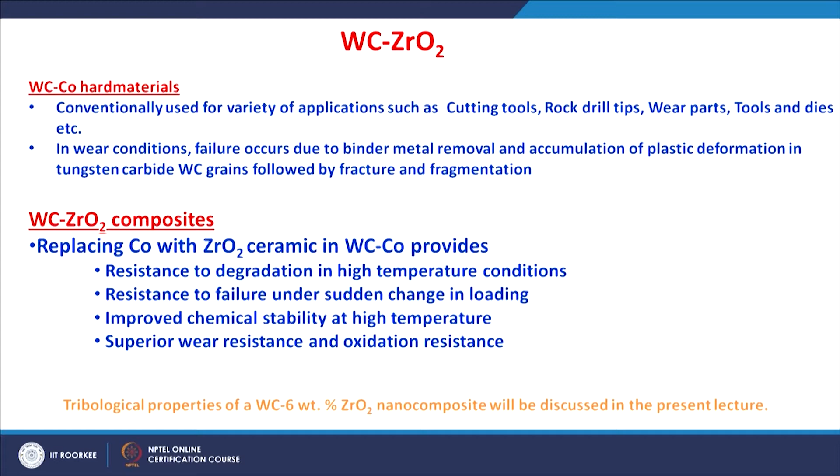So in this lecture we will see the key results obtained for the tribological behavior of a tungsten carbide 6% zirconia nanoceramic composite. First, tungsten carbide of around 0.2 micrometer and zirconia, which is a tetragonal zirconia stabilized by 3% yttria.

So 3 mole percent yttria stabilized zirconia powder of around 27 nanometers. These two powders, tungsten carbide and zirconia, were mixed into a tungsten carbide 6% zirconia powder mixture.

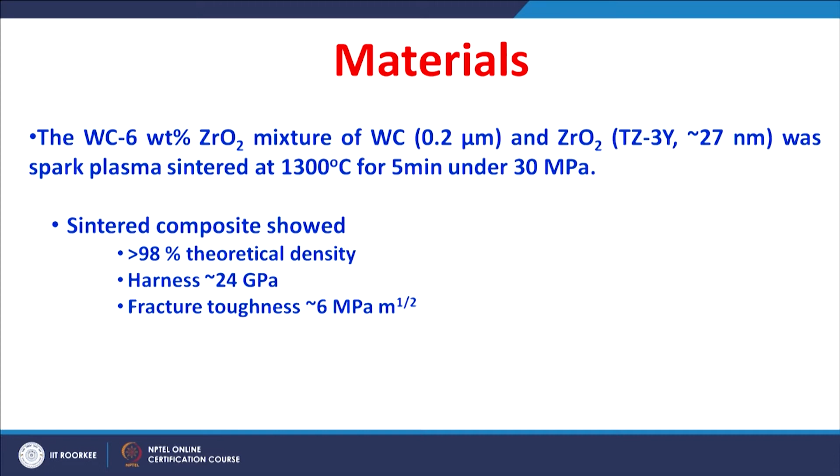This mixture was spark plasma sintered at 1300 Celsius for 5 minutes under 30 MPa pressure, with a high heating rate of around 600 Kelvin per minute.

All these ceramic composites showed very high density, more than 98% of theoretical density, and also showed hardness of around 24 gigapascal and fracture toughness of around 6 MPa root meter.

The tungsten carbide cobalt material generally has a hardness of around 11 to 12 gigapascal, whereas tungsten carbide zirconia has an extremely high hardness of around 24 gigapascal. Of course, the fracture toughness is moderate at 6 MPa root meter.

The sintered tungsten carbide zirconia ceramic composite was investigated for phase analysis and microstructural characterization. Phase analysis by X-ray diffraction indicates predominant phases of tungsten carbide and tetragonal zirconia, with no other phase formed and no change from tetragonal to monoclinic zirconia during sintering.

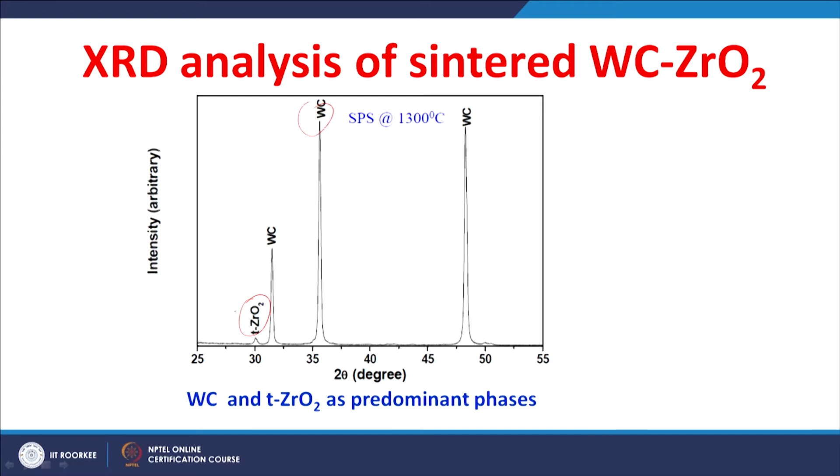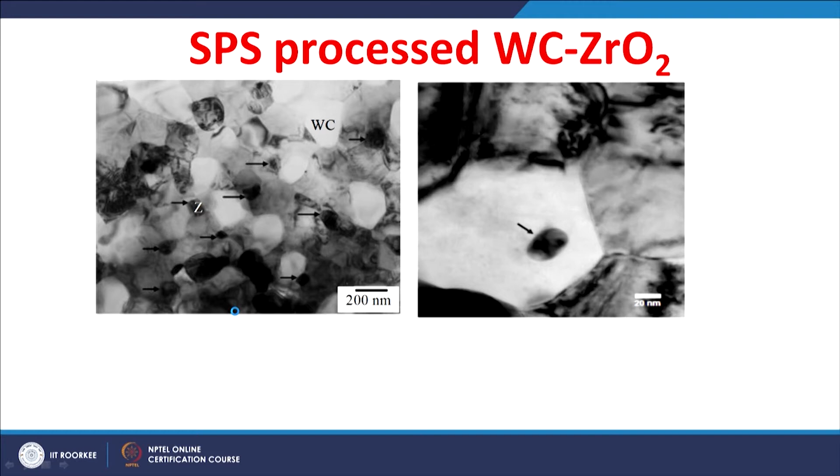This shows the efficiency of the sintering technique we used, that is spark plasma sintering. The spark plasma sintered tungsten carbide zirconia ceramics showed a microstructure of equiaxed tungsten carbide grains, with zirconia particles along the grain boundary as well as inside the grains of the tungsten carbide.

The equiaxed tungsten carbide grains have an average grain size of around 0.3 to 0.5 micrometer, whereas the zirconia particles are still within the nano region, around 30 nanometers.

Considering the initial particle size of around 0.2 micrometer for tungsten carbide and around 27 nanometers for zirconia, this sintering technique is efficient in producing a dense tungsten carbide zirconia ceramic material with zirconia particles in the nano region distributed within the grain structure of the tungsten carbide.

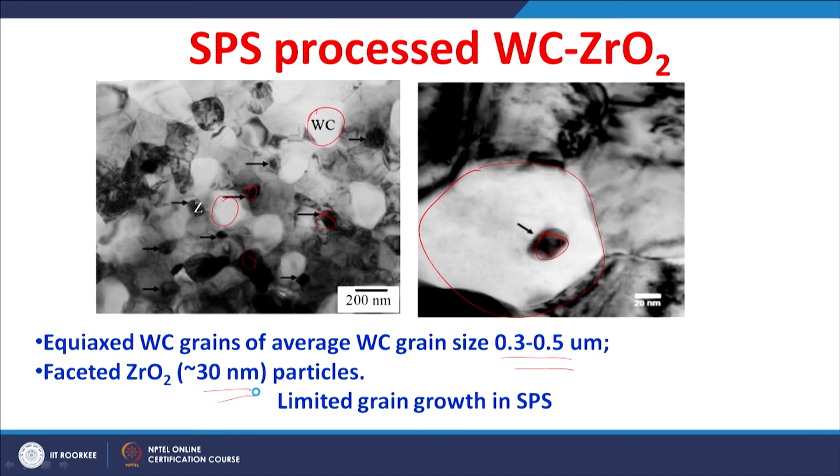There is limited grain growth occurring in spark plasma sintering, which gives a combination of superior properties. That is how we got a very high hardness of around 24 gigapascal and a moderate fracture toughness of around 6 MPa root meter.

These tungsten carbide 6% zirconia ceramics were fretted against steel at different loading conditions with a fixed combination of fretting parameters.

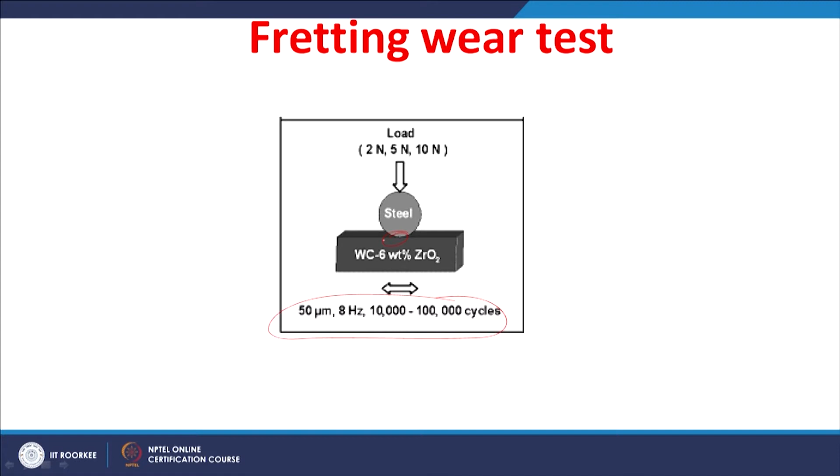This fretting was done under mode 1 fretting conditions, which gave gross slip conditions at the contact. The fretting test parameters were fixed at 50 micrometer oscillation displacement with a frequency of 8 hertz, and fretting was conducted with varied numbers of cycles from 10,000 up to 100,000 cycles.

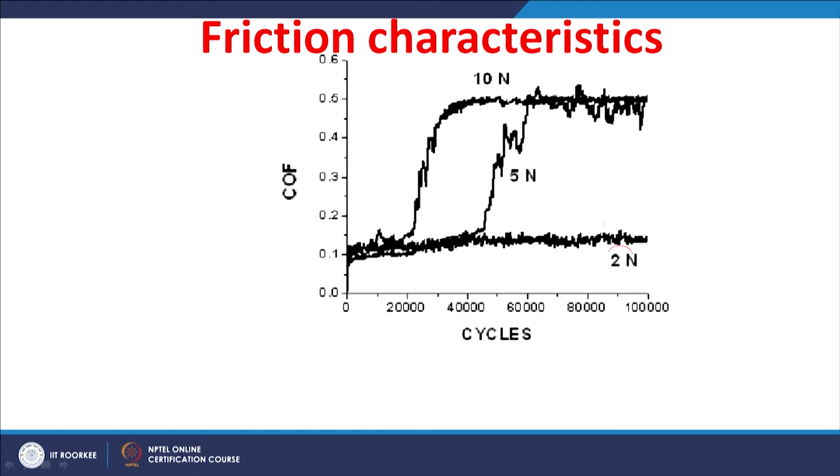Let us understand the frictional characteristics as a function of fretting duration and load applied. This fretting shows friction is strongly dependent on both load and number of cycles. At lower load, friction drops to a very low coefficient of friction around 0.1 within about 20,000 cycles, and remains almost the same throughout the test up to 100,000 cycles.

There is no change in the coefficient of friction. Whereas, as the load is increased to 5 Newton, the friction coefficient is around 0.1 to 0.15 in the initial 20,000 cycles, and as it reaches 40,000 cycles it shoots up, and by around 60,000 cycles it goes to the maximum coefficient of friction of around 0.5. So there is a transition with the fretting duration for the test done at 5 Newton load.

And if you see the test done at the 10 Newton load, the transition occurs even at an early stage. The coefficient of friction was less in the initial stages of around 20,000 cycles. Immediately after 20,000 it went up to

0.5 average coefficient of friction in the steady state, and this reaches around 40,000 cycles. So there is always a running-in state and the steady state, with no much difference between the running-in state coefficient of friction and steady state coefficient of friction at lower load, whereas there is a difference in the running-in state coefficient of friction and the steady state coefficient of friction at higher loads.

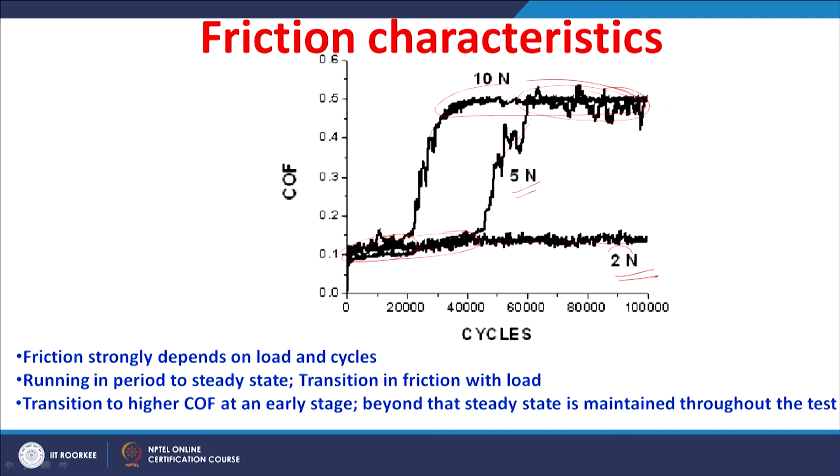In addition to that, we saw a transition occurring from low load to higher load in the friction. So the transition to higher coefficient of friction occurs at an early stage for the test done at a higher load, and once it achieves the steady state, it remains in the steady state throughout the test.

The wear rate was also determined. You can see the wear rate varying from around 0.2 into 10 power minus 8 mm³ per Newton meter to around 1.2 mm³ per Newton meter. So there is a change in the wear rate with change in the load as well as the number of cycles of this fretting. First of all, the wear rate is of 10 power minus 8 mm³ per Newton meter.

This is a very low wear rate as you compare with the wear rate obtained with the conventionally sintered tungsten carbide 6% zirconia ceramic. This shows 10 power minus 6 mm³ per Newton meter, whereas the spark plasma sintered tungsten carbide zirconia nanoceramic composite exhibited a wear rate of 10 power minus 8 mm³ per Newton meter.

So increase in wear rate is also observed with increase in the load as well as the cycle. Now, at a lower load, the wear rate was less for the test done for a small number of cycles, that is 10,000 cycles. For the test done at 10,000 cycles, even if you change the load, there is no much difference. It actually changes from around 0.2 to around 0.4 into 10 power minus 8 mm³ per Newton meter.

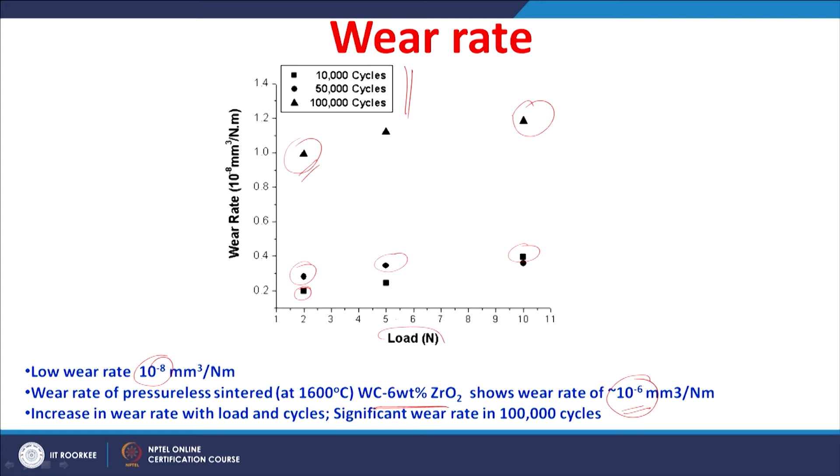Similar to that we observed for the friction, wear also changes with the load or the fretting duration. So the wear depth also indicates very important information. There is a negligible wear depth at lower loads of 2 Newton, but a significant increase in the wear depth as well as the wear rate at the higher loads of 10 Newton.

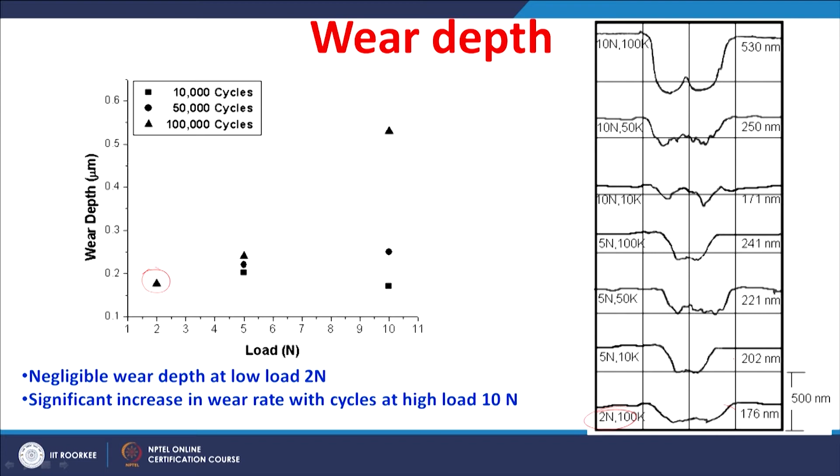Now these surfaces also indicate the tribolayer is severely cracked. The severe cracking of this tribolayer indicates it is non-protective in nature. So when the tribolayer is non-protective, it cracks, and then the underneath surface is again subjected to further wear. At a higher load of 10 Newton, more pronounced cracking is observed after 100,000 cycles.

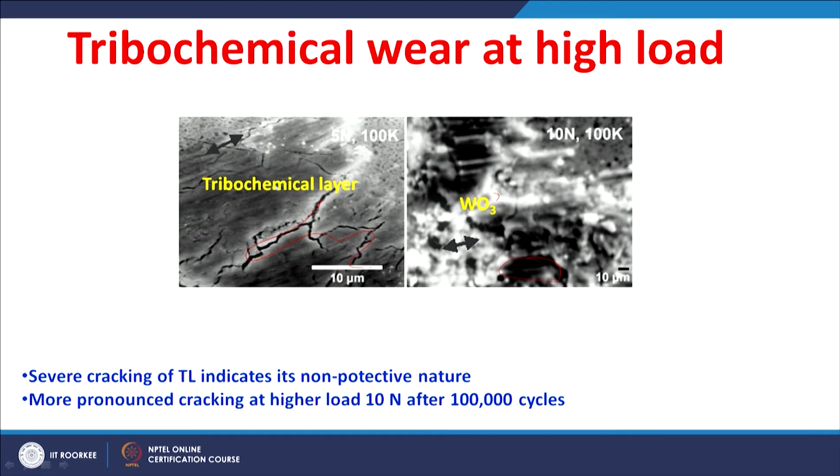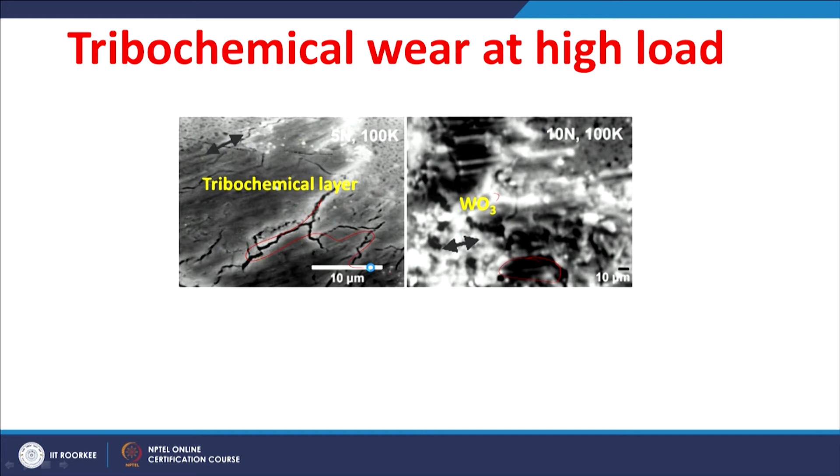So tribochemical wear is dominant at higher loads, that is 5 Newton or more. At lower loads it is mild abrasion, and at higher loads of 5 Newton or more it is a tribochemical layer formation and then removal, which we call tribochemical wear. So there is a change from abrasion to tribochemical wear with change in load in these studies.

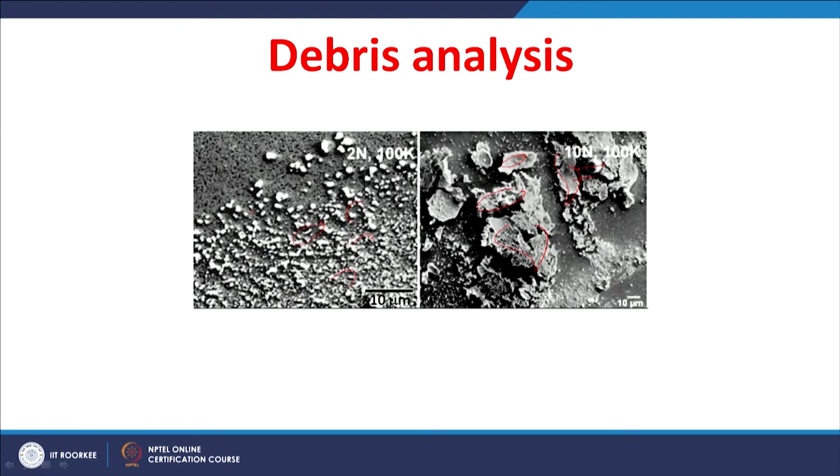The debris are also collected, and the debris analysis shows there is a striking difference with respect to load. At lower load you can see debris of a very small size, whereas at increased load of 10 Newton dominantly the debris are sheet-like or plate-like with a larger size. Of course there is smaller debris here too, but predominantly it's sheet-like debris.

The sheet-like debris is around 50 to 100 micrometers, whereas the small size debris observed after fretting at lower load of 2 Newton is around 2 micrometers. So there is a change in the size as well as the shape of the debris with respect to load.

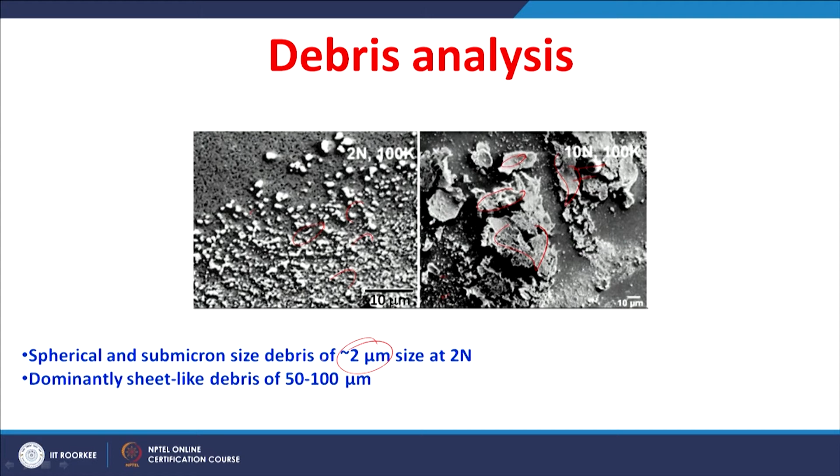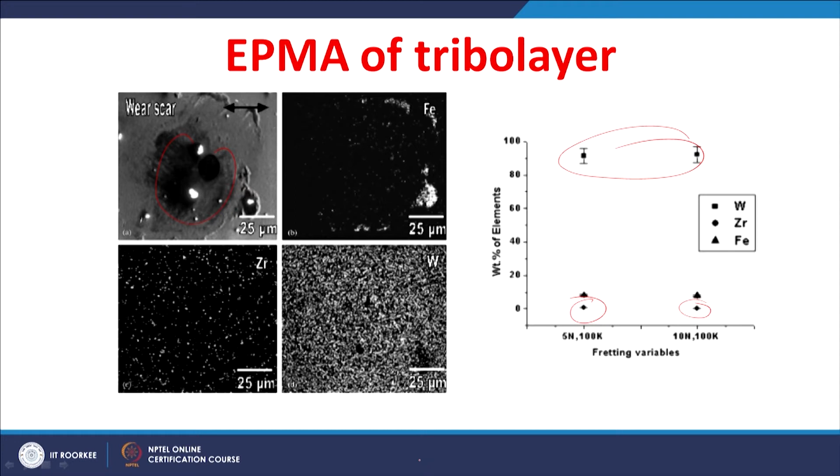So let us understand the wear resistance of the ceramic nanocomposites. Two important factors have to be considered: number 1, the high hardness, and number 2, fine microstructure.

The higher hardness, which is extremely high for this nano ceramic composite, around 24 gigapascal, leads to lower friction and wear, but this is observed only at a lower load of 2 Newton. At lower load there is very little wear, characterized by low wear depth, less than 1 micrometer. The material damage is restricted to the submicron region below the worn surface.

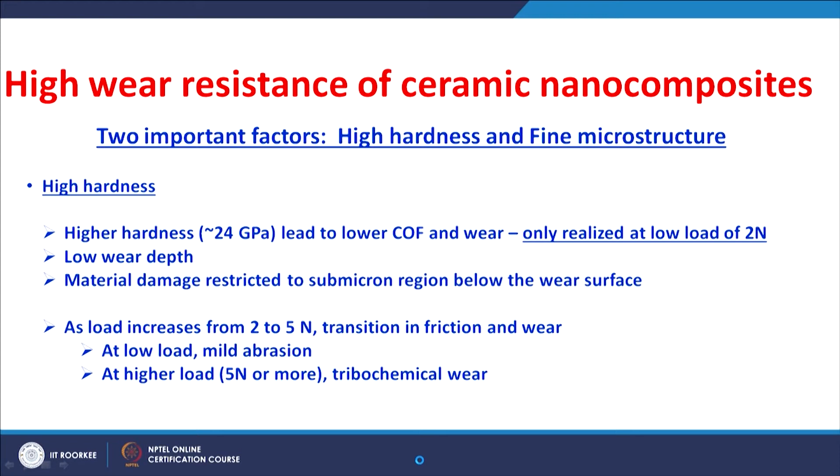Whereas at higher load, as load is increased from 2 to 5 Newton, there is a transition in the friction and wear. At lower load there was mild abrasion, whereas at higher load, that is 5 Newton or more, tribochemical wear dominates.

With respect to the finer microstructure obtained by spark plasma sintering for these nanoceramic composites, at lower load of 2 Newton you find fine debris. The fine debris particles necessarily indicate the pull-out of tungsten carbide particles, and once these are pulled out, these tungsten carbide particles are subjected to fracture.

These are caused by the repeated fretting strokes, and once these pulled-out tungsten carbide particles are in contact where this fretting is continuing under ambient conditions, there is a possibility for oxidation. So the pulled-out tungsten carbide particles are oxidized to tungsten oxide.

So we can infer that there is mild oxidative wear occurring at the contact at lower load conditions of 2 Newton, whereas at higher load of 5 Newton or more, these oxidized debris form a tribochemical layer rich with tungsten oxide or iron oxide. Once this tribochemical layer is stabilized, the contact is actually between the steel ball and the layer.

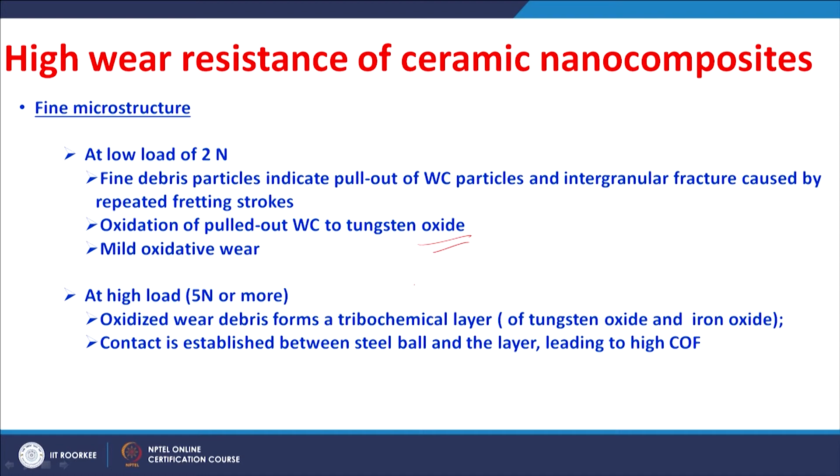It is not between the steel ball and the tungsten carbide zirconia surface, but between the steel ball and the layer, and because of that you get a higher coefficient of friction. So we can also understand the transition in the wear mechanism by studying the debris size.

In a lateral fracture model, the minimum load required to produce the fracture, because of the point contact, is dependent on the fracture toughness and hardness values.

Roberts has explained that the minimum load required can be determined if you know the fracture toughness and the hardness for the Vickers indentation. In this formula, beta is a constant relating the hardness to diagonal; for Vickers indentation it is 2.16, whereas the constants eta and theta are taken as 0.2. From this, we can get the minimum load required for fracture to occur where there is predominantly abrasion.

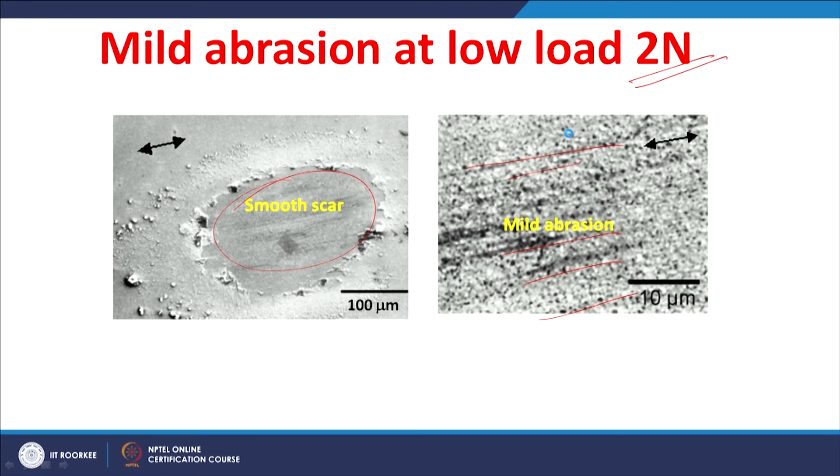The minimum load required for such an abrasion induced fracture is around 2.15 Newton for the investigated ceramic composite. As we have seen, there is predominantly mild abrasion happening at a lower load of 2 Newton. So it is quite possible that at a lower load of 2 Newton, such a fracture is initiated and then the removal of material occurs by abrasion.

Once this material is removed as debris, these debris are trapped in the contact and few of them may be ejected out of the contact. That leads to a lesser coefficient of friction, and also because of these debris in the contact, it actually is a 3 body abrasion. In 3 body abrasion, these particles are able to roll easily, so it gives lesser wear.

So all this at a lower load of 2 Newton, you get a minimum load of 2 Newton that is sufficient for fracture to occur. Once this fracture occurs, debris particles are in contact and few of them are ejected out. That leads to lower coefficient of friction, and because of the easy rolling, it actually gives lesser wear as well. Whereas in case of a higher load, we saw there is tribochemical wear dominating.

The tribochemical wear actually resulted in sheet-like debris of a larger size, around 50 to 100 micrometer. We can also understand this with the adhesion theory. The size of the debris can be related to the work required for adhesion to happen. So the work of adhesion involves the load as well as the tangential force.

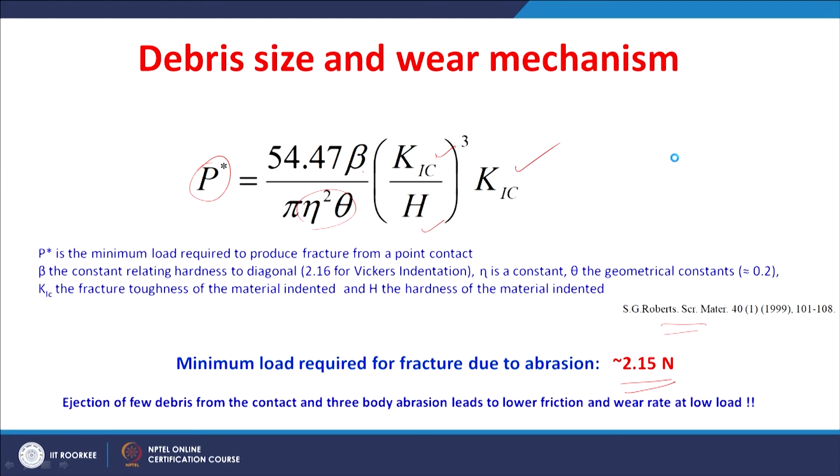Also, the higher coefficient of friction and wear can be understood by the non-protective tribolayer nature. We have seen the tribochemical layer formation and then their cracking, which indicates the non-protective nature. This non-protective tribolayer fractures and gives the larger sized, sheet-like debris, and correspondingly higher wear at higher load. So these two mechanisms, the abrasion occurring at lower load and the adhesion and corresponding tribochemical wear occurring at higher load, can be understood from the debris size.

So these two mechanisms can be understood from the debris size.

Concluding the results obtained on the wear behavior of the tungsten carbide zirconia nanoceramic composite under fretting conditions against steel: lower coefficient of friction around 0.1 is observed at lower load of 2 Newton, whereas the frictional behavior undergoes a clear transition leading to higher coefficient of friction around 0.5 at higher load of 5 Newton or more. Mild abrasion to severe wear through tribochemical layer formation and its delamination is observed with increase in load from 2 Newton to 10 Newton.

Under the selected fretting wear conditions, the tungsten carbide zirconia nanoceramic composite exhibits lower wear depth and higher wear resistance because of the hardness of the nanocomposite, which is around 24 gigapascal. The formation of mild abrasion scratches along with finer sized debris indicates better wear resistance of the composite at lower load.

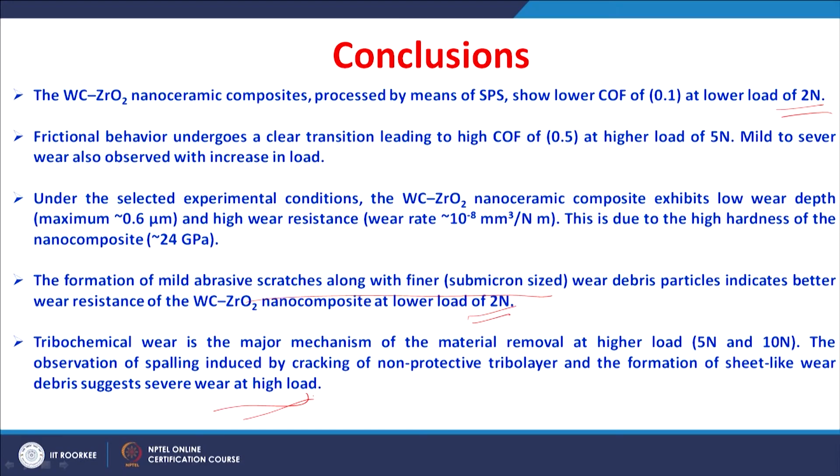So this particular study indicates the wear behavior of this tungsten carbide zirconia nanoceramic composite depends on the load as well as the fretting duration. The mechanism of material removal changes from mild abrasion to tribochemical wear with change in load from 2 Newton to 10 Newton. Thank you.